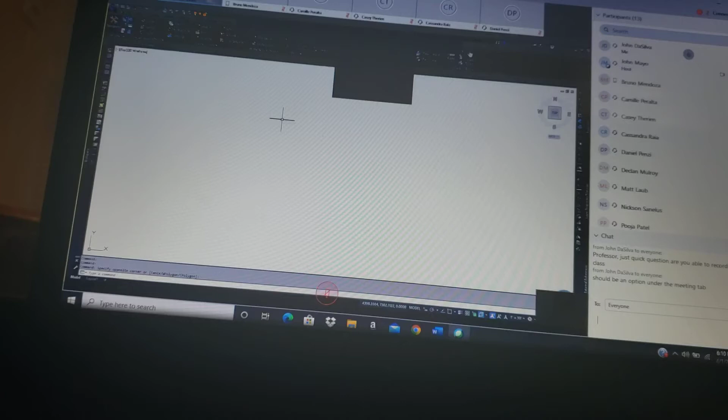I don't know if I gave you this example, but what Bruce used to do during a meeting: the professionals would be up in front of the board at tables. At the corner of the table, he'd have a legal pad with an itemized list of everything he wanted to speak about, in order, and all the points he wanted to make. He'd stand up and pace back and forth before the board very slowly, and every time he passed his table, he'd peek down to make sure he was moving on to his next point.

You've got to think about your audience, because anytime you're a speaker, whether it's getting up in front of a board to provide legal testimony or teaching a class...

Does someone have a question?

Sorry, probably just a video or audio glitch, but you want to have that presence about you, you want to have that expert knowledge about you.

I also spoke to you guys earlier in the class about your need to know your project. If you're giving testimony, you need to review those plans, especially if you didn't design it. It's perfectly legal to provide testimony on a set of plans you didn't design, but you'd be responsible to review those plans and calculations and then provide your signature on it as well.

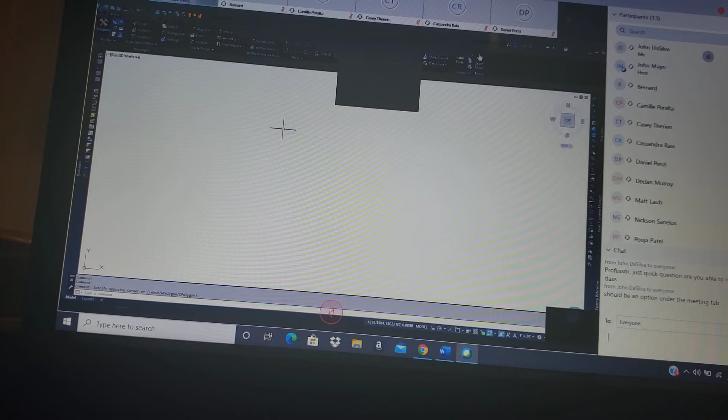When I was younger, I used to play in some rock and roll bands. Quick little peek into my personal life, you can see over there a series of like 7 guitars, still play. The first time I got up on stage I was probably about 16 years old, and I was so nervous, I had butterflies in my stomach. I could barely move, and I literally needed to drink a bottle of Pepto-Bismol to calm my stomach.

It takes time, it takes practice. But years later, I had the experience. Getting up on stage wasn't a big thing, I was no longer getting booed off, I got some skills. What I do now, I don't have an issue getting up in front of people and speaking.

The last 2 years I spoke at Autodesk University. I think I've told you that's a global audience of engineers, surveyors, CAD geeks, and tech professionals, and that's another arena where you can't pull the wool over their eyes. You've got to know what you're talking about, and it's best to prepare your own material so you do know what you're talking about.

All right, so generally speaking, for public speaking, what you really want to do is slow down.

You want to take breaths, especially if you start getting nervous or flustered. Pause, take a deep breath, relax, and continue your conversation. There's nothing wrong with doing that. Regain your thoughts.

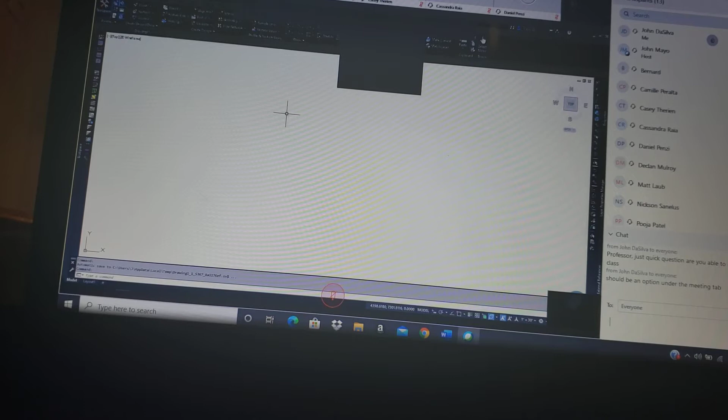I'm not asking you guys to go out and visit the site, but in the real world, on a real project, those site visits are critical, even if it's just a kickoff meeting with professionals, so you know what the real world is. When you give your presentation, have a good outline.

Know exactly what you want to speak, be able to follow it. I recommend you practice and time it, and make sure you meet your allotted time. You guys don't necessarily need a PowerPoint presentation for this.

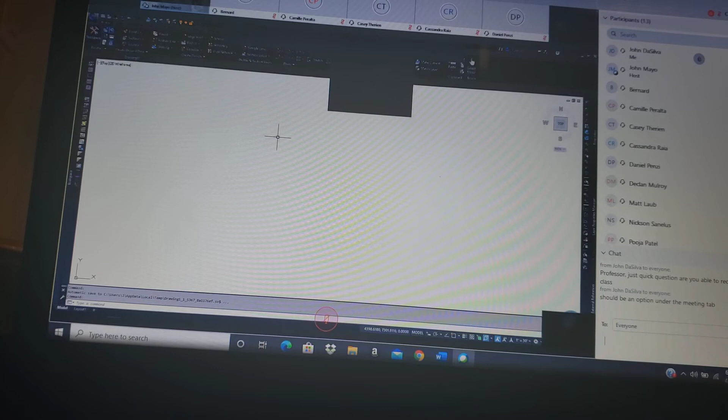When I go to a meeting, I have my plans printed. I put them up on an easel, and I submit them as evidence to the board, and I just cycle through them and explain what I am proposing. And then I get questions asked about what I am proposing, and they decide if they want to approve what I am proposing. That's the overview of that process, and it's very, very general, of course.

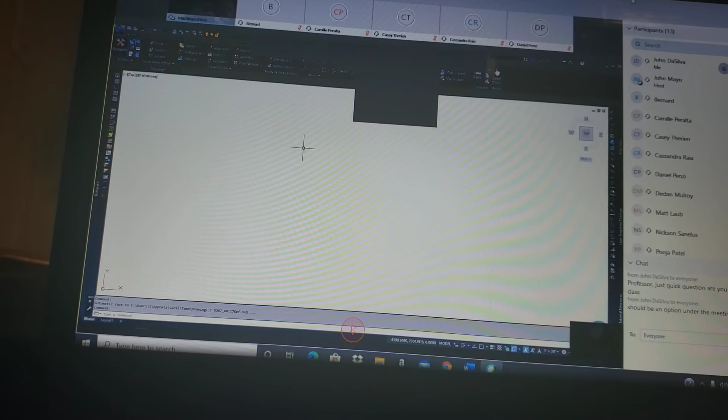But when you guys present this, what I want you to do in general terms is get up, introduce yourself, provide your credentials as we would before a board. If you guys went to a board, you know that every professional has to get up before the board and provide credentials that would justify the board accepting them as an expert.

And you need more than just your degree to be deemed an expert. You're going to need experience in there. Hopefully you have bosses that will guide you into that. That's how you will get it. They'll give you, start you off on something simple like a parking lot expansion or a pool plan, and you start taking them in, and then eventually you'll start doing bigger things and you become a recognized expert in your field.

But provide your names, your credentials, and then I want you to describe your project, and that is providing the scope. And we all know the project is, in a nutshell, we are proposing a subdivision of land, construction of a new residential roadway, installation of storm, sanitary, and water utilities to serve the road and the new building lots. That is the scope of your work.

You should then quickly introduce the existing conditions and then demonstrate how you met design criteria for your project. This is ultimately what the board is approving. And what you are going to do before the board is tell them this project is governed by the municipal bulk zoning code, it is governed by RSIS, and it is governed by the state stormwater rule. And you're going to tell us how you meet those rules through your presentation.

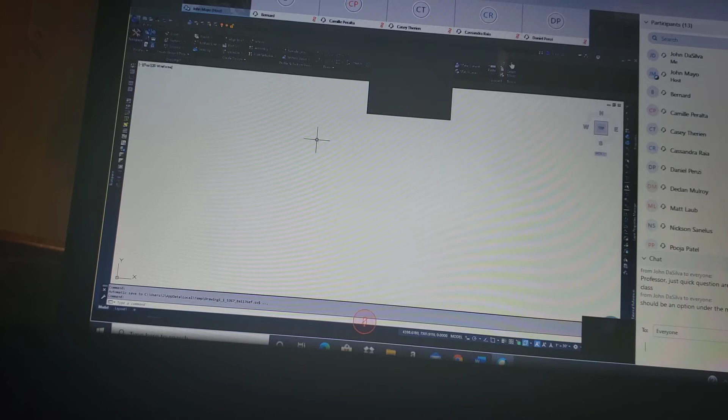Again, if you guys have questions on what you are submitting, this is really what it comes down to now: you've got this project to submit in four weeks. You've got a month left, all right? Looking good, I hope you're caught up. If you're caught up and working on your residential grading and fine-tuning some of the hydraulics, you're in real good shape and shouldn't have an issue. If you're far behind, you're going to have big issues, you're going to be cramming, and meeting those requirements is going to be pretty tough.

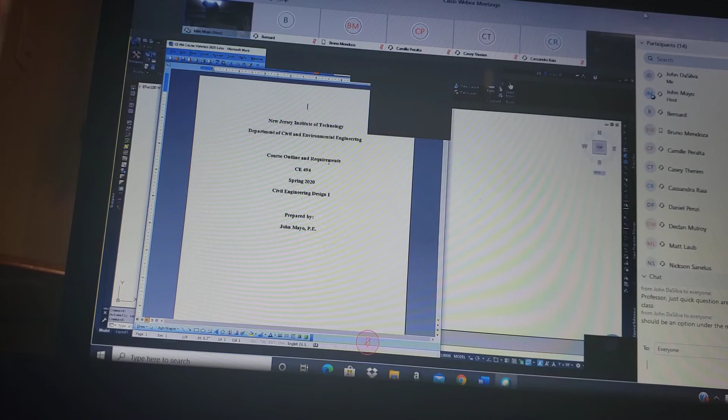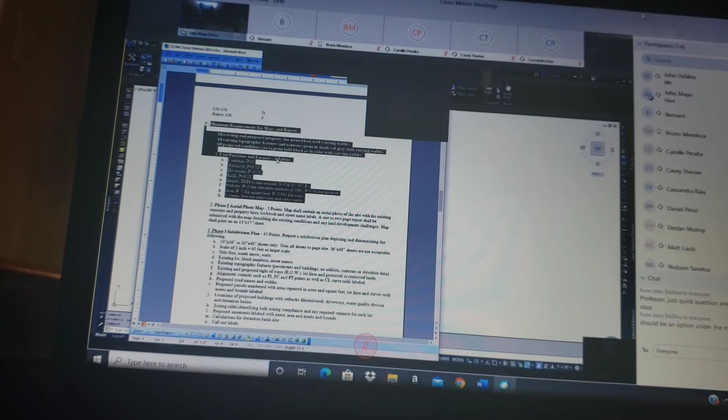Again, all your requirements are in this document, including the requirements for your presentation. The requirements here are the minimum requirements for maps and reports, and this is your specific phase 1 and phase 2 down here.

Don't forget, sheet 1 of your plan set is going to be your revised subdivision plan. I gave them all back to you with markups after the phase 1 submission, so you will resubmit them as sheet 1 of your plan set. Again, everything you need for the maps is in here.

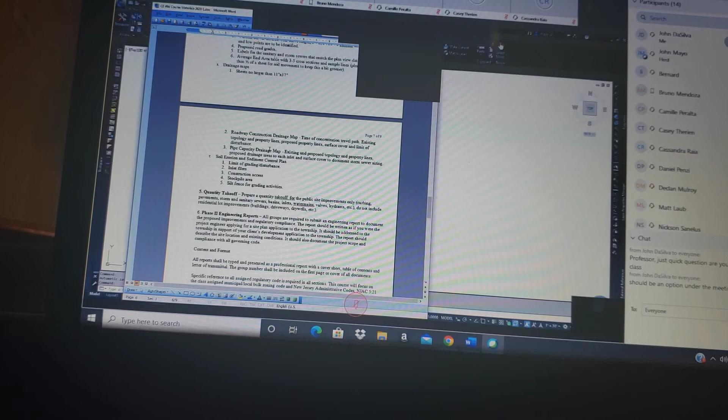And don't forget to check your notes. I gave you further design criteria. As an example, I gave you maximum proposed grade is 1:3. I gave you the general guidelines for all the utility layouts.

You guys have to do a quantity takeoff. You can get onto the internet and look up approximate prices for these. You can contact manufacturers, contact contractors if you know any who are willing to help you out, but this information is pretty readily available. I'm asking you to put cost onto it just so you guys can get an idea. It's really more of a quantity takeoff, but try to put cost estimates to it so you can get an idea of what it would cost to construct this project. I'll let you know my approximate magic number on the last day.

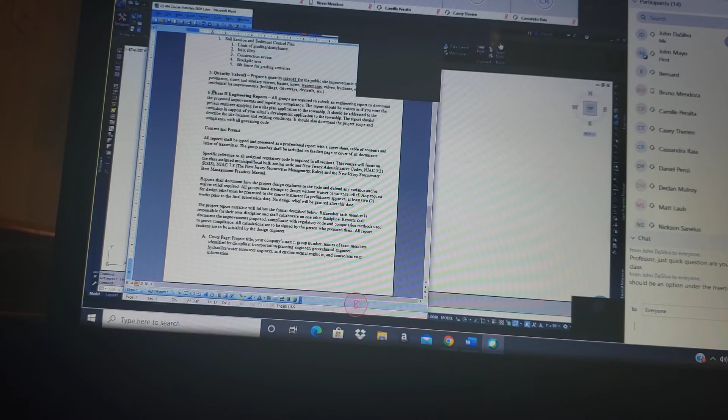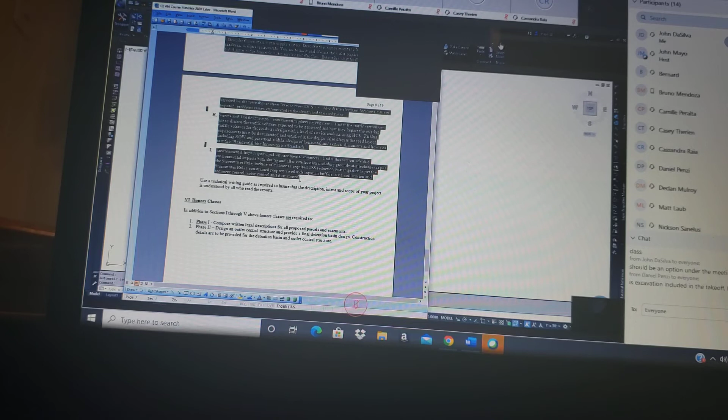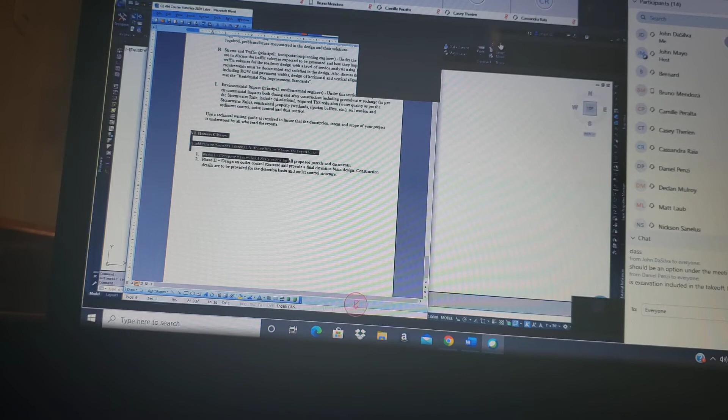Here are the requirements for your reports. Again, this is all basically fully outlined for you - everything you should be discussing, and everything you should include to show how you are meeting and abiding by the rules or the code. Of course, ignore the honors class if there are none.

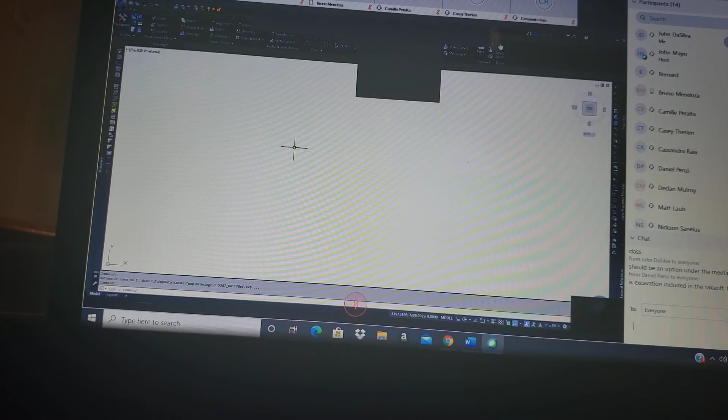Is excavation included in the takeoff? Yes, you should include quantity of cut and/or fill, and any import and/or export - again, the net that would be required for that. So we would need trucking prices, hauling and whatnot, dumping, et cetera? If you can get hauling prices, I definitely want to see the quantities. But you can definitely look up some rough quantities for hauling, yes.

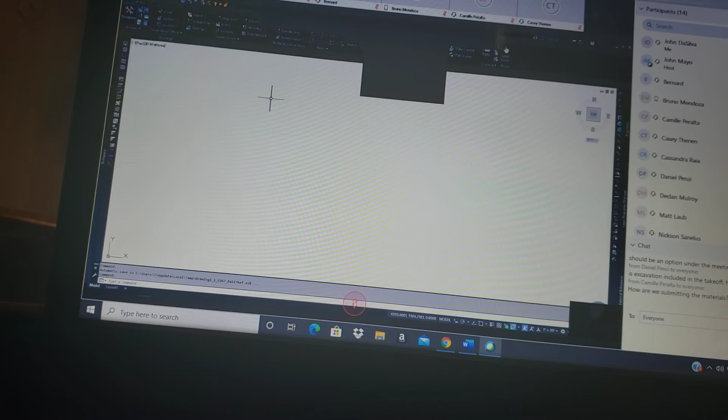Again, I'm not looking for perfect numbers from you guys. I'm hoping for you guys to get an idea of what it might cost on this - much like the rest of this project, where I know you guys are not professional engineers who have been practicing for 10, 20 years, and I know your designs may not be perfect. But I'm expecting them to be close. I expect to see a sanitary sewer sized 6 to 8 inches, not a 36-inch sanitary sewer, so I expect to see gravity conveying flow of that sanitary sewer. But I'm not going to nitpick every little thing, and if a pipe size could have been one size smaller, you're not going to get points off for that.

So as far as submitting the materials, that is a good question.

What I am probably going to do is, if you have... I don't want to make one global share box for this, because it's going to be a lot of data.

Is there anyone out there who doesn't have a free Google Drive or some other account where they could post it, where I alone could access it, download it, and then you could make it unavailable to the world directly after I download it? Is there anyone who cannot do that? If so, please put it into the chat.

What I am hoping you can do is send me a link to a Dropbox or similar cloud storage site where I could download your PDFs, final PDFs of the sheets, your DWGs for the whole project, your storm sewer files for storm and sanitary, your hydrograph files for the residential and detention basin sizing, and anything else you have accumulated for this project.

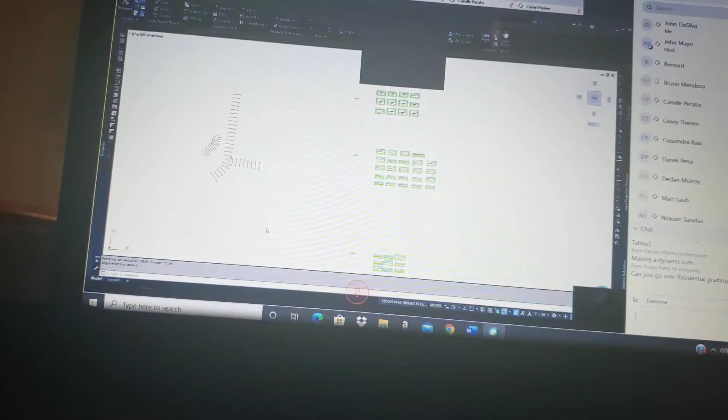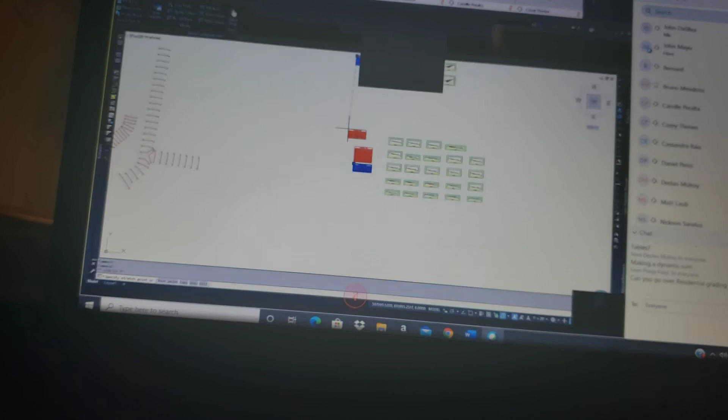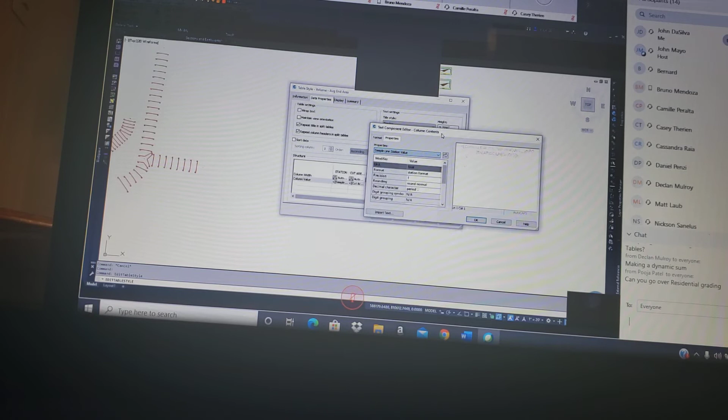Unfortunately, the developers did not leave us much to do with these tables. They are populated, and if you go into any one and edit them, you are really limited to the amount of information you could put in, based on the sample line and the material. You can put in swath widths, net volumes, cut areas, fill areas, all that stuff. But there's no way to really do math on a Civil 3D table where I can right click and insert a row or column and start summing values.

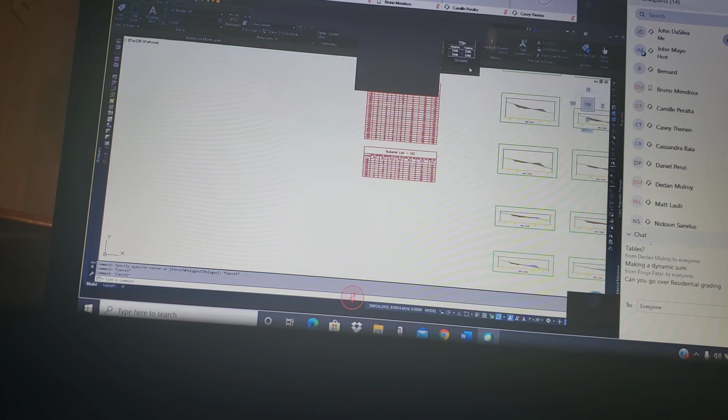But an AutoCAD table can do that. If you go to your tables, table styles, I have one set up. If you're using an NCS, you probably have only the standard, but these are just AutoCAD table styles. You can manage the table styles here and create your own.

Here's mine. If you hit modify or new, you'll get this dialog. You can set different settings for data, headers, and the title of your table. You configure it all here, and you can set fill colors, alignments, data types, and all that stuff.

Sizes. Professor? Yes. So I don't know if everyone's seen this, but some of the toolbar up top is being blacked out, can't see it. I don't know if it's just the recorder. Okay, maybe. Is that better? No, it didn't do anything. Okay, let me close that.

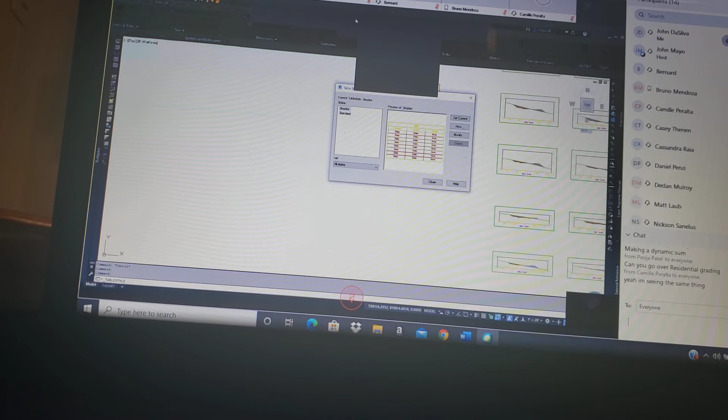Does that do anything? Full screen for participants? No, it's still blacked out, some of it. Okay, hang on. All right, that did something, that removed some of it. All right, so yeah, that's the recording.

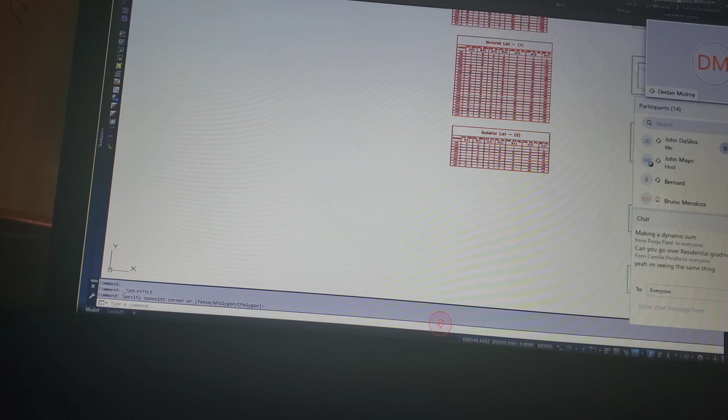Let me see if I can minimize this a little bit. You see the top of Civil 3D there now? It's just half the ribbon up top is blacked out. Good. No, it's still there. All right, hang on, let me try sharing the application instead of my screen. Share content.

Is that any better? Yeah, that's it. Okay, all right. No problem.

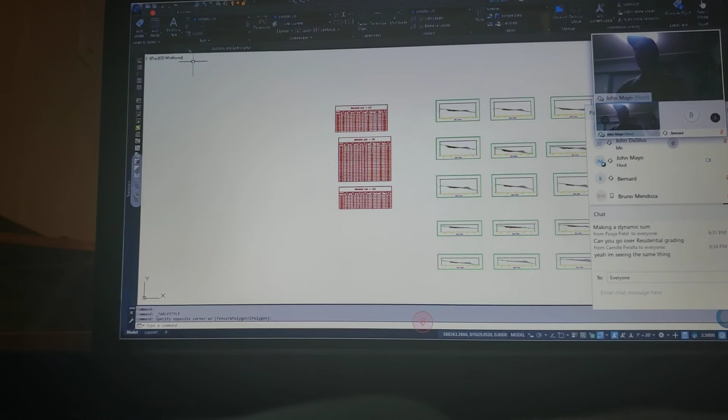So, again, I went to my annotate tab. You have your text, dimensions, centerline, and tables are right here. You click that little drop down arrow and you get to your manage table, and this is where I took you guys in for the modify or new. You're going to get the same dialog that allows you to set up your general properties for lines, for data headers and titles, and then you can also set up text and borders.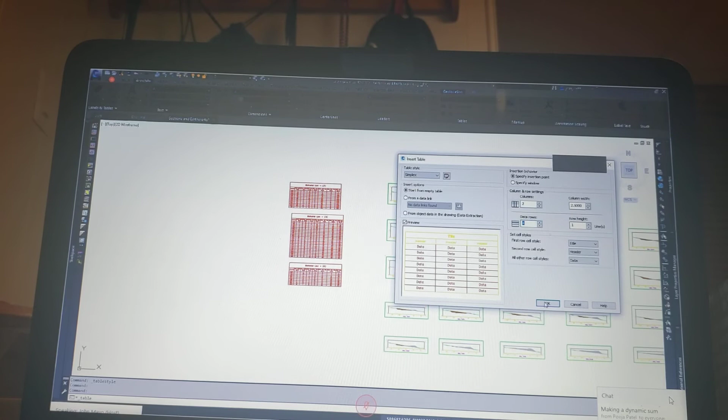So you can set up your own table, but tables will do your sum, and it's still going to take some manual work. I would need really just 2 columns, 4 data rows, hit OK, and I would put this in here.

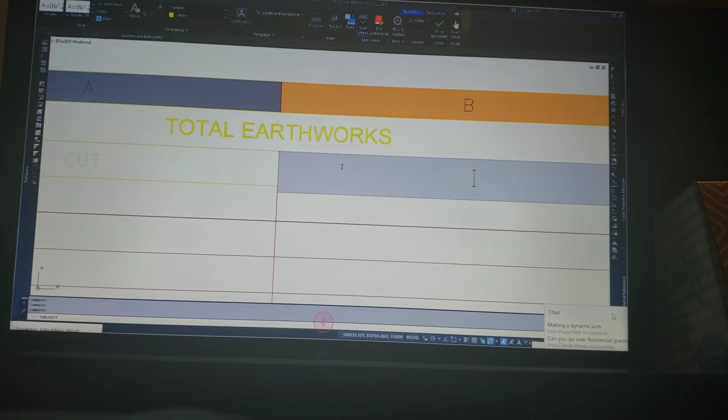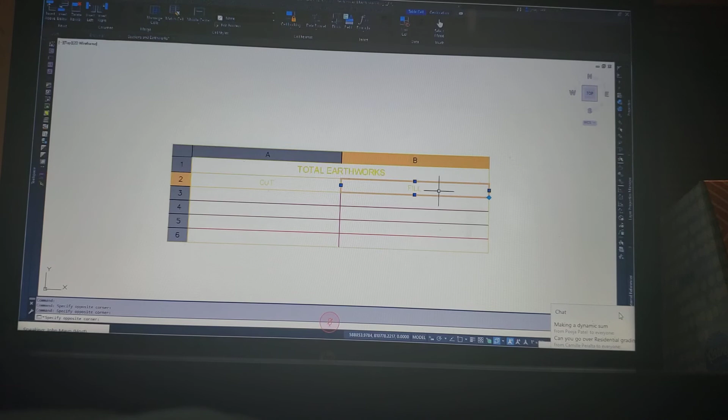And actually I would need a third. Is everyone familiar with AutoCAD tables? These work very much like a spreadsheet. And you can do with a right click, you can do a lot of the things that you would do in Excel, like I could add column, insert right, and over here you could have net.

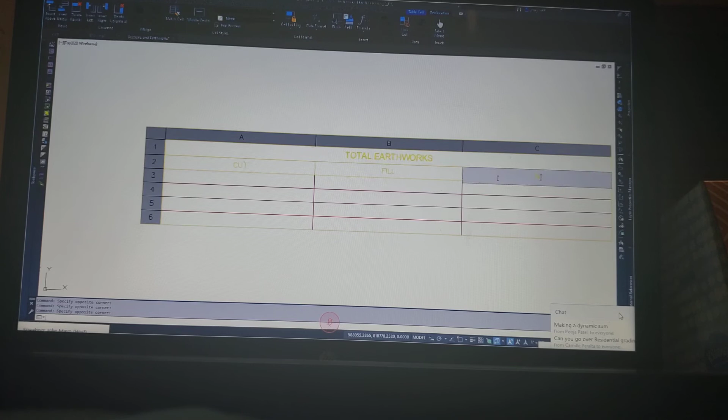And I guess that background color is not going to do you guys any good. Let me change. There you go, a little better. Yes, I'm sure. So this table works a lot like Excel.

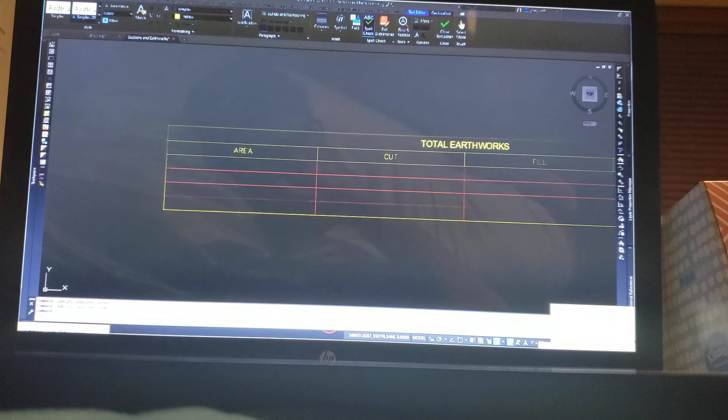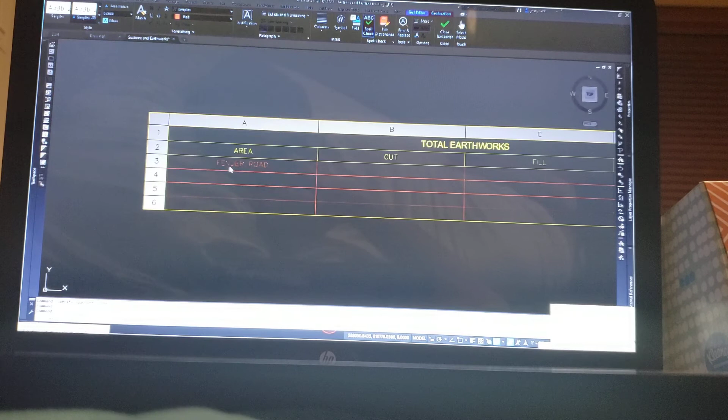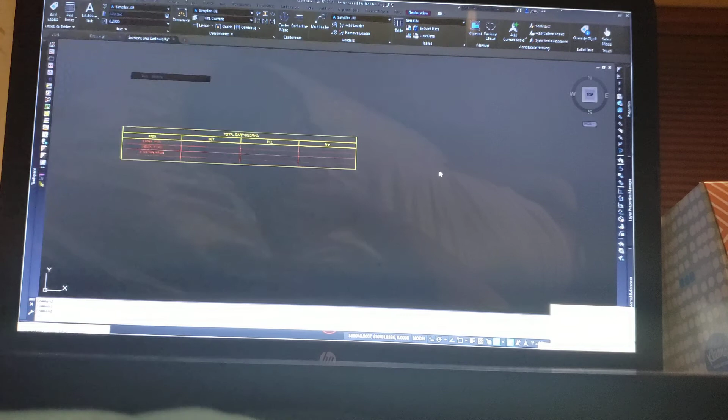And then, of course, you could type in your values. And I would probably, again, find another reason to split my windows here. I can see these guys and this together. And I'd come up here and I'd look at...

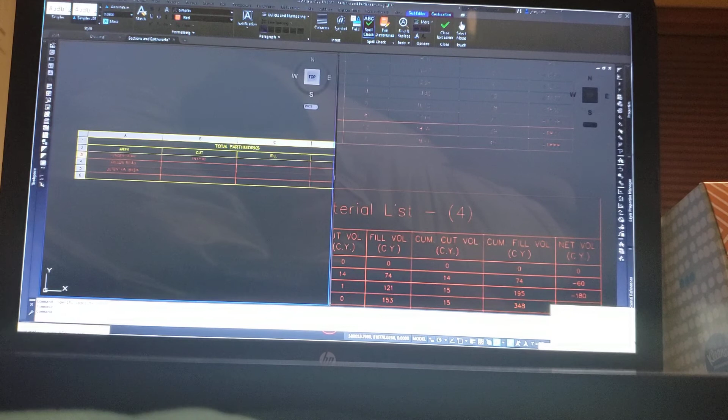I'm not sure which is the right road, but this is 1933. This is 45. And this is 188.8.

And you don't even need to do the full, but you want to see if you're balanced. This over here, 1078, 1571, and this is a minus 493.

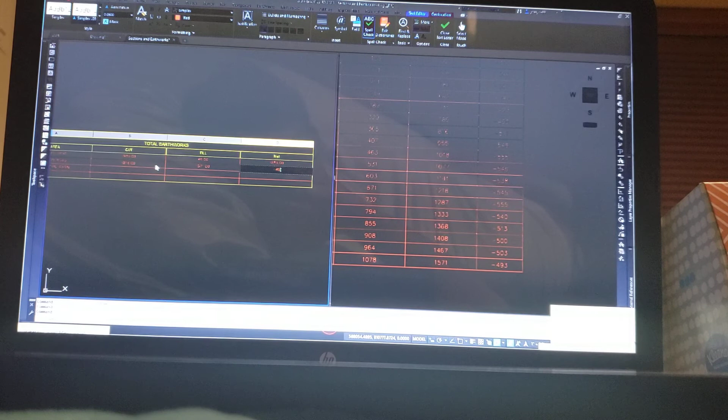And then you come down to your third table, and then if your areas change, you can just update the sums. If you didn't have the cut and fill, you just have the total. You really don't need the cut and fill, I'm just putting it in for demonstration. 225, and that last one is minus 123.

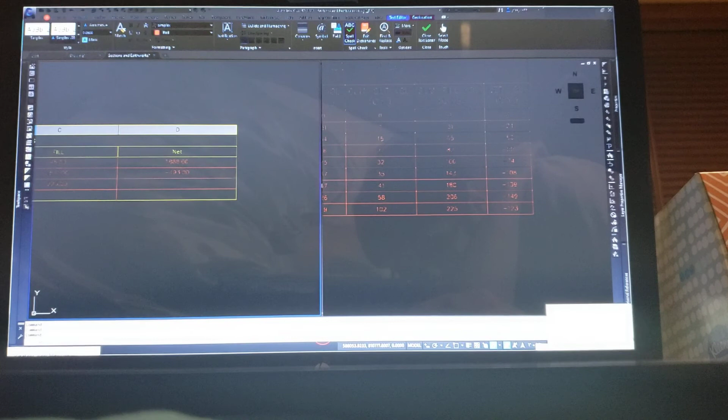Then down over here, just like Excel, equals sum, parentheses. Now this is where, unlike Excel, you can't just click cells and drag them. You literally have to type them out. So this is going to be D1 colon D3, semicolon D3 colon D45, and then end the parentheses, and we get our sum.

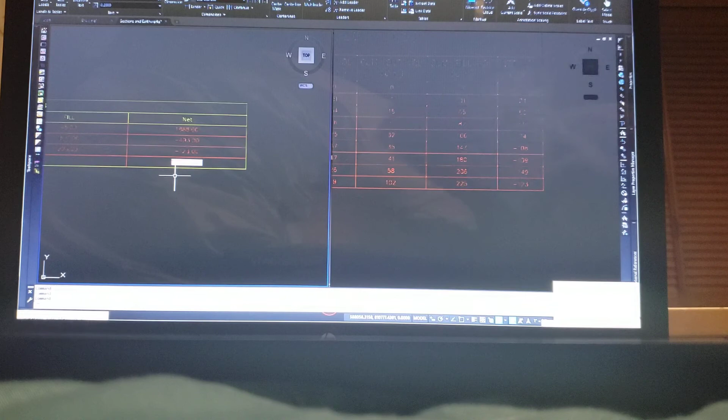You can go to your table properties and change the precision. Generally, all of them you want to. So that's one way you could do it.

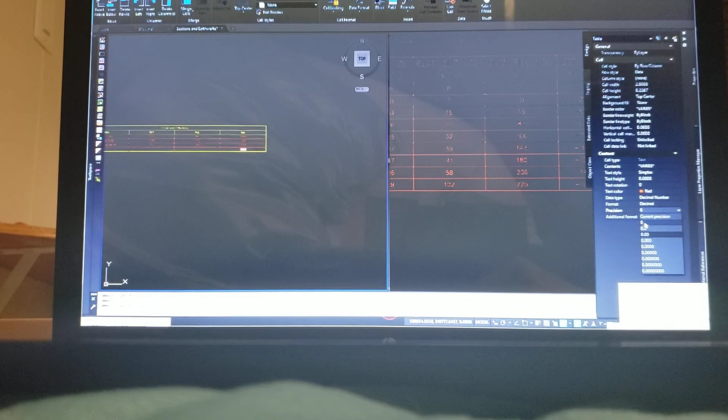You could use a text string too, but we are not going to be able to get Civil 3D with multiple corridors to sum the tables without some sort of scripting. If you're into Dynamo, that might be a good task for Dynamo, but out of the box, Civil 3D is not prepared to do it.

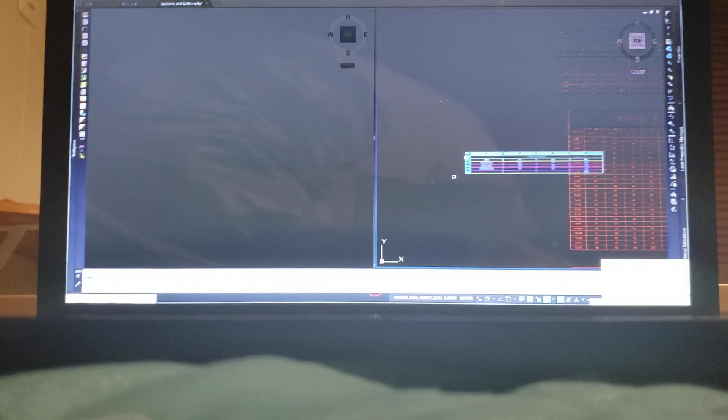This table is small, made for paper space, so I could scale it up by 12, and it's closer to this other table size. So I could show these three tables lined up a little nicer on my plan with, like I said, 4 or 5 typical cross sections. You don't need to print out all of them.

All right, so did that answer the question for summing the tables? Yeah, thank you. Okay.

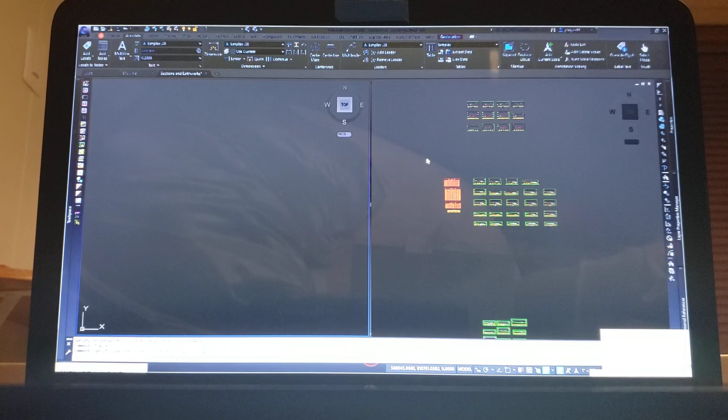So what else do we have? Soil erosion, let's look at that. Here, and some extents, sample lines, and I'm just going to save this.

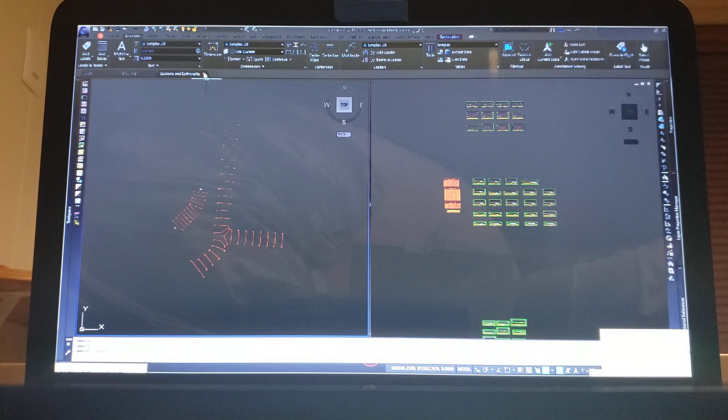So what is the question with the soil erosion and sediment control? Is it how to make the plan, or what is required on the plan? How to make. So the plan...